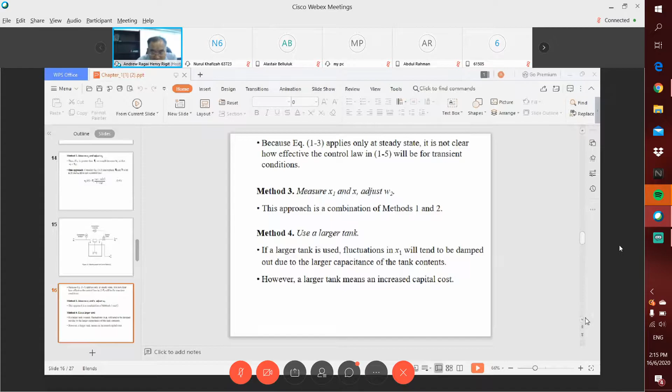Okay. So I just moved my office next to Dr. Norman Zaimin, the Deputy Dean's office. Yeah. So it's next to the Dean's office. So probably I cannot shout like before. That's why I purposely borrowed a microphone from Dr. Amir for this class. Yeah? So I can speak in a medium, I guess, not so loud, but hopefully all of you can hear me. Yeah.

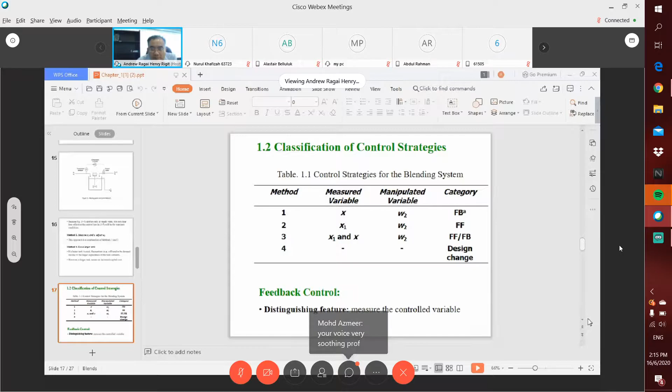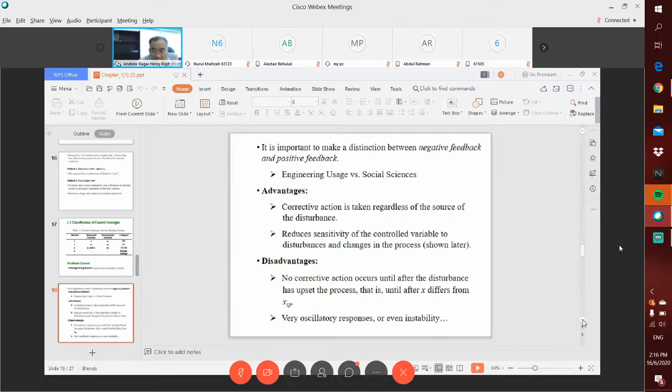So there's the four methods that we're looking into: method 1, 2, 3, and 4. And then from there we look into the concept of feedback control. And we look into the advantages and disadvantages of feedback control systems. And then for feedback, also we have feed-forward control.

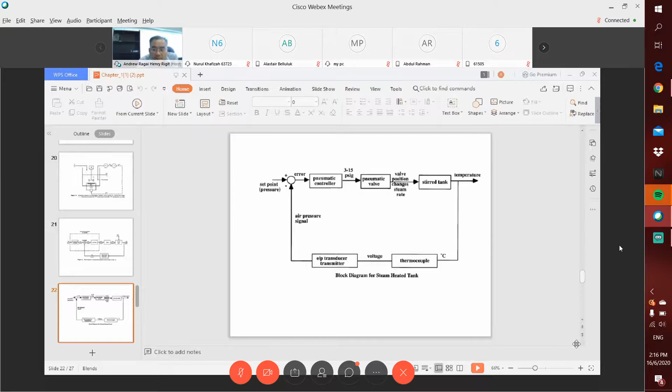And then finally, we discuss the justifications of process control. So what are the justifications of process control? So we have as many as 9 specific objectives of control here. Starting from increased product throughput,

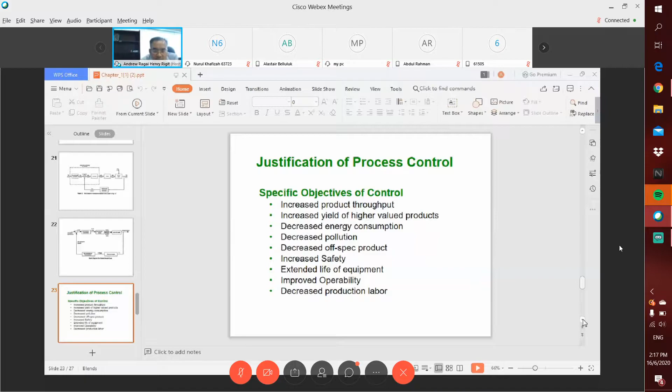increased yield of higher valued products, decreased energy consumption, decreased pollution, decreased off-spec product, increased safety, extended life of equipment, improved operability, decreased production labor. So the 9 specific objectives of control.

And if we interpret that quantitatively, through some qualitative results as shown in the graph here, we look into before control and after control. So we minimize the number of off-spec products when we apply control, as shown by these two graphs here, before A and after control system applied B. Okay?

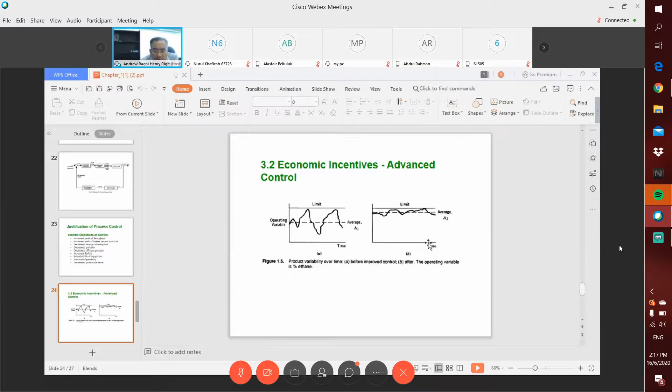And this is the distribution, the Gaussian type distribution. So you can see here that after you applied control, the range becomes narrow, when we have control systems in place.

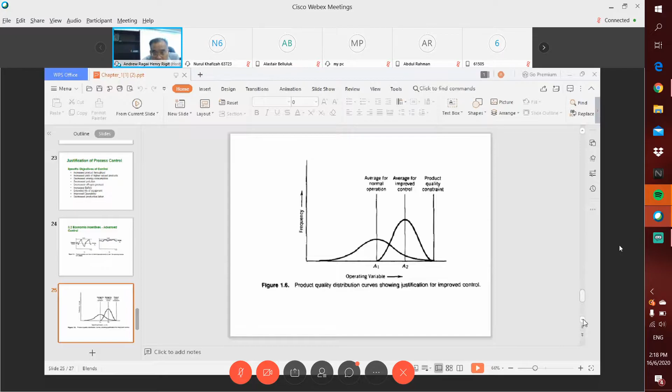So what you have learned before together with Dr. Fikri in the earlier part of the course, before the MCO, we discussed a lot about measurements and actuations and the sensors. Then we moved on to safety, environment, and equipment protection.

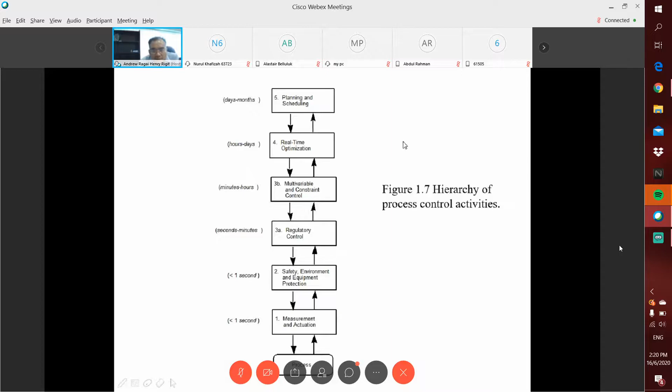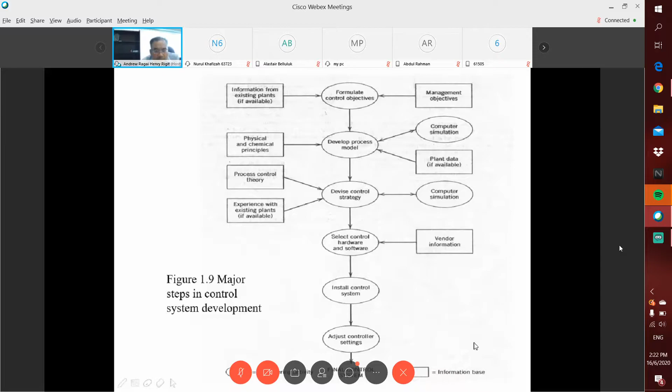And with that, next we can select control hardware and software together with some information from the vendor or the supplier of the hardware, the equipment, or the software, for the control systems as well as for the simulations. And from there, we can install the control system, and we can also adjust the controller settings accordingly. And finally, we have the final control system. So that is what we covered last week.

Okay. So for today's lecture, we will look into mathematical modeling.

You can see my ELIP website, right? All of you can see it? Okay. So I can open this PowerPoint,

on mathematical modeling. So we look into what it actually means with mathematical modeling of chemical processes that can be used in control systems. So just some idea what mathematical modeling means. Basically, a mathematical model is a representation of the essential aspects of an existing system or a system to be constructed, which represents knowledge of that system in a usable form.

So everything should be made as simple as possible, but not simpler, because remember in the lecture last week, we saw that when we develop the mathematical model, we need to come up with certain assumptions. Of course, the understanding of the theory or the fundamentals of the process, be it addition of heat, for example, will lead to energy equations. Or the understanding of conservation of mass will lead to the calculation of a mass flow rate or velocity in this case.

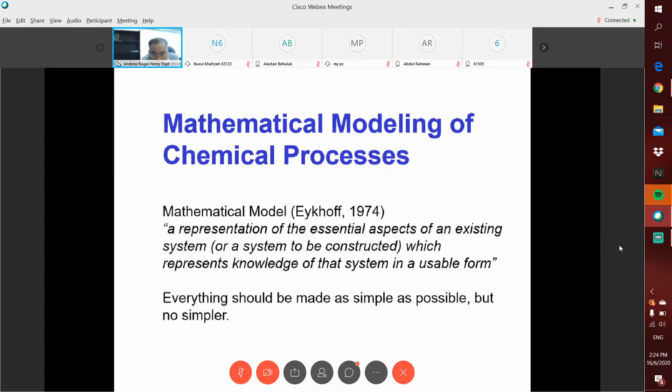So the general modeling principles: the model equations are at best an approximation to the real process, where we say that all models are wrong, but some are useful. With the view that you come up with a model based on certain assumptions, it is only as good as your assumptions. So if you come up with bad assumptions, the models are probably not 100% correct. So that's why we say that all models are wrong.

But nevertheless, based on the assumptions that we made for that particular process, it will be useful. It will probably not be 100% correct, but we try to make it as accurate as possible. So mathematical models are applied in engineering activities. The third point is that modeling inherently involves a compromise between model accuracy and complexity on one hand, and the cost and effort required to develop the model on the other hand.

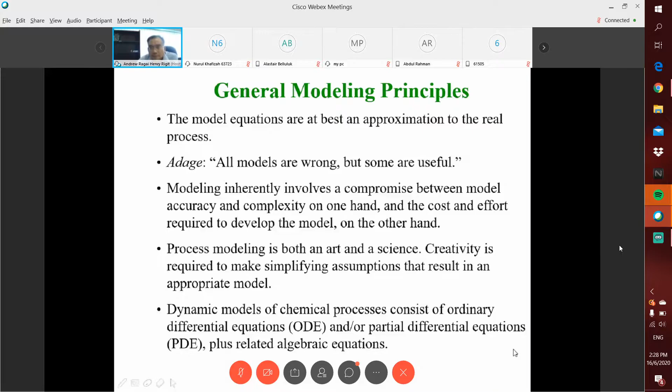First of all, we need to state the modeling objectives and the end use of the model. And they will determine the required levels of model detail and model accuracy. So from there, after you determine the objective, in other words, what's the purpose of the model, we come up with number 2 there, to draw a schematic diagram of the process and label all process variables.

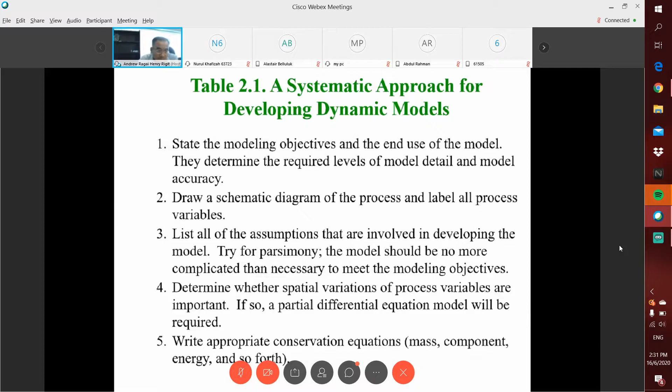Then number 6, we need to introduce equilibrium relations and other algebraic equations from thermodynamics, from your understanding of thermodynamics, transport phenomena. Transport phenomena is mass transfer. Thermodynamics is normally with regards to heat or energy. Transport phenomena is the terminology used in chemical engineering when we're talking about mass transfer. Chemical kinetics as well as the equipment geometry.

And from there, we perform a degrees of freedom analysis to ensure that the model equations can be solved. So we solve in X direction, Y direction, Z direction, etc. And number 8, we need to simplify the model. When we simplify the model, it is often possible to arrange the equations so that the dependent variables or outputs appear on the left side and the independent variables or the inputs appear on the right side. This model form is convenient for computer simulation and subsequent analysis.

So we have our point there that we want: we want that the physical process can be mathematically modeled. And when we have a set of outputs and inputs in the form of equations, then we have some sort of matrix form, and this can be used for computer simulation and other analysis later on. Number 9, we need to classify the inputs as disturbance variables or as manipulated variables.

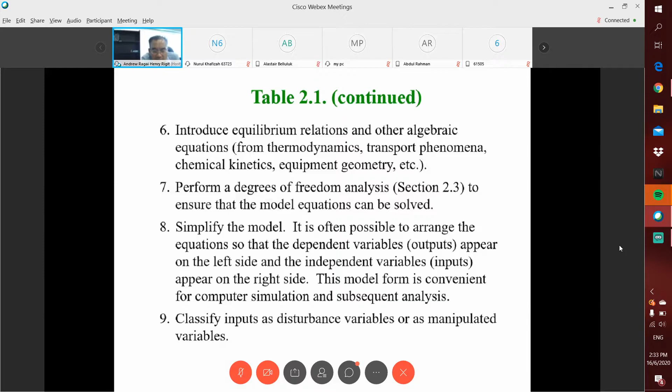So what are the modeling approaches? First, we have the physical or chemical, with regards to fundamental or global theory. The model structure by theoretical analysis will cover material or energy balances. Material, talking about mass. Energy, talking about the equations of heat transfer. And then heat, mass, or momentum transfer. And from thermodynamics, we have the chemical kinetics as well as the physical property relationships.

So the model complexity must be determined based on our assumptions. The more complex your assumptions, the more complex is your model, in other words. And it can be computationally expensive and cannot be done in real time. And some of these models could be expensive or very time consuming to obtain. But what we notice now, with the advancement in information technology, our computer systems have become more and more powerful.

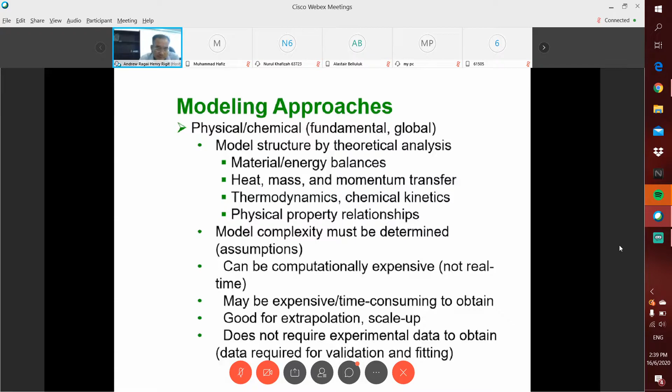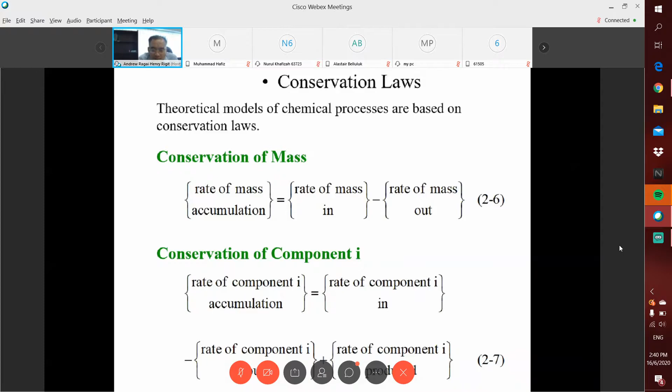We also can have conservation in the I, J, K directions, or X, Y, Z directions, where I is the unit vector in the X direction. We're talking about the rate of component I accumulation equal to the rate of component I in minus the rate of component I out plus the rate of component I produced.

With regards to conservation of energy, this refers to the general law of energy conservation, called the first law of thermodynamics. It can be expressed as: the rate of energy accumulation equals the rate of energy in by convection minus the rate of energy out by convection, plus the net rate of heat addition to the system from the surroundings, plus the net rate of work performed on the system by the surroundings. So the total energy of a thermodynamic system, U total, is the sum of its internal energy, kinetic energy, and potential energy, as given by equation 2.9.

Any questions so far? No, sir, thank you. Okay. So most of you can follow me? Yes. Okay, great.

What we are doing now is very fundamental. Basically, what we try to do, in other words, is apply what you have learned in thermodynamics, fluid mechanics, as well as your good understanding of mathematics, especially algebra and vectors from your Maths 1, 2, 3, and 4, and come up with mathematical modeling, and from here we're talking about the simulation.

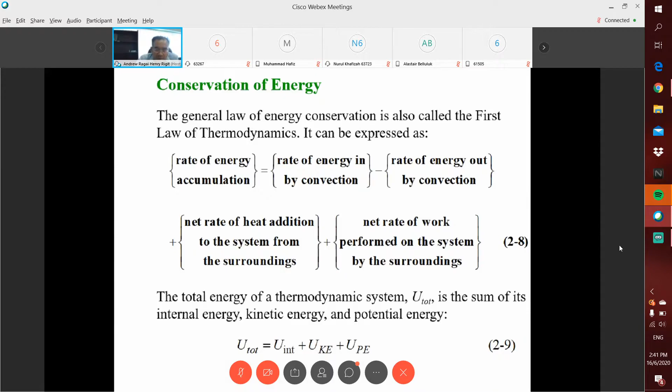So here we're talking about empirical value, or in other words known as the black box, where we have a large number of unknown parameters, and it can be obtained quickly, for example through linear regressions. Normally the model structure is subjective, but nevertheless probably it's not appropriate to extrapolate it.

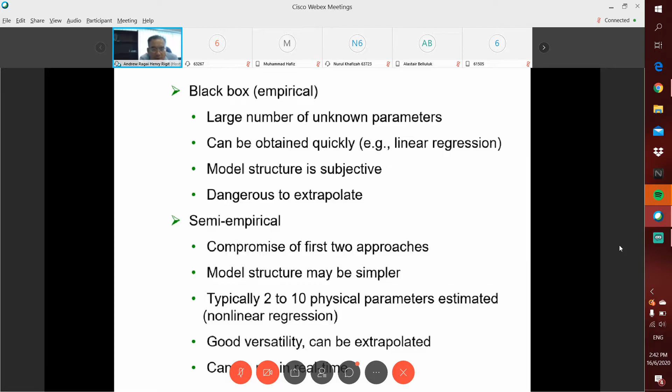Then we also have the semi-empirical. This is the compromise of the first two approaches, where the model structure may be simpler, and typically 2 to 10 physical parameters are estimated with non-linear regressions, and it has good versatility and can be extrapolated. This leads to the concept of real time, because semi-empirical models can be run in real time.

For linear regressions, we have equations of y equal to C0 plus C1x plus C2x2. So it's a curve which means x2 there.

So the number of parameters affects the accuracy of the model, but confidence limits on the parameters fitted must be evaluated. Therefore, the objective function for data fitting is to minimize the sum of squares of errors between data points and model predictions, where we use optimization code to fit parameters.

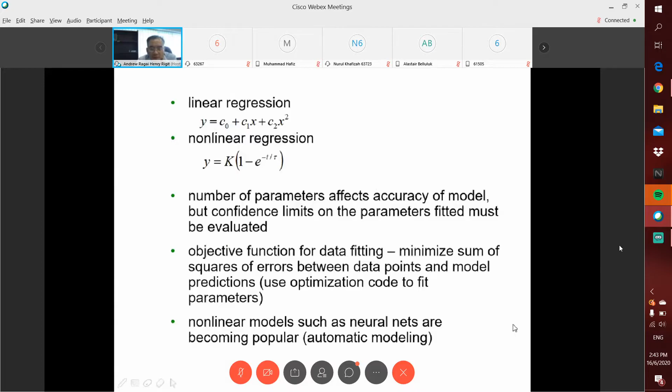And non-linear models such as neural nets are becoming popular, and that will lead to automatic modeling. So we actually use mathematical modeling. In short, we are using mathematical modeling first to improve understanding of the process.

So it could be a thermodynamics or fluid problem or related with energy. From there we come up with the energy equations. We're talking about energy or the flow, part of the Bernoulli equations, momentum equations, for example the conservation of energy. Basically that's improving the understanding of the process.

So the second, to optimize process design or operating conditions. Thirdly, to design a control strategy for the process. Remember, we're looking at the hierarchy of process control. And fourthly, to train operating personnel. So these are the users of this mathematical modeling.

So imagine, for example, the fourth point, you are given ANSYS and you are asked to do computational fluid dynamics based on Fluent in ANSYS. So instead of just keying in the numbers there, by right, in order for you to explain your simulation result in Fluent ANSYS in regards to flow, velocity profile, etc., you should know what the equations behind that are.

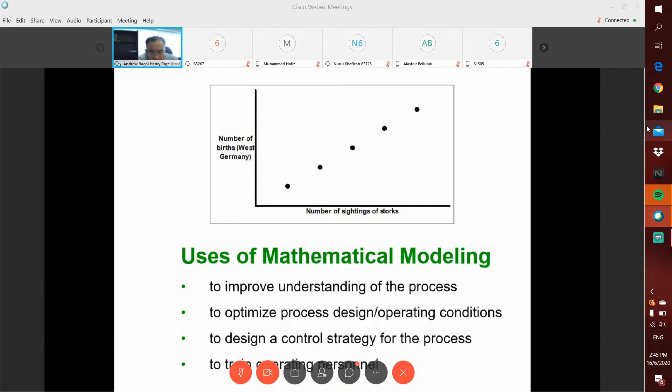Simulations work, they've been used by the computer to do the simulations work, yeah, you will be able to explain, perhaps you can explain the results more clearly and more convincingly. So that means training the operating personnel in this case.

Now we look into some of the examples, illustrative examples in developing dynamic models. So we look back into our blending process, how we model it. Remember our stirred tank blending process that we discussed last week, which I reviewed with you earlier on.

So we have liquid coming in with different concentrations X1 and W1, mixed with another fluid component X2, W2 inside the blending tank. And from there we have the output X and W. So we look into the mathematical modeling for this.

The first one, the assumption: we say that the rate of accumulation of mass in the tank equals the rate of mass in minus the rate of mass out. So this is our assumption. Here we can simply say that we do not consider leakage, for example.

Leakage, maybe the tank got a hole on it, and the thing does not come out as X and W, but due to leakage it comes out not following this conservation of mass, for example. Not to mention liquid loss due to evaporation, maybe, especially if this tank is being heated up to certain degrees. If the steam escapes, basically the mass reduces over time.

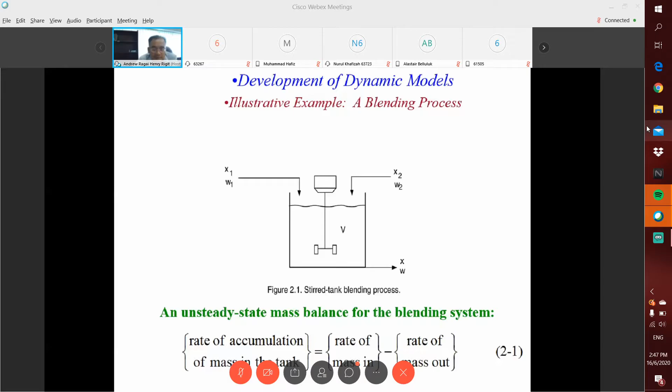So from here we have the mathematical equations: d(v rho)/dt equal to w1 plus w2 minus w. In other words, we take w equal to w1 plus w2 in our standard equations. But here, because we're talking about a process, we're talking about the change with regard to time, so it is d(v rho)/dt equal to w1 plus w2 minus w.

So w1, w2, and w are mass flow rates. And the unsteady state component balance is given by d(v rho x)/dt equal to w1 x1 plus w2 x2 minus wx.

And the corresponding steady state model was derived, given by that equation. Everything moved from the left hand side to the right hand side, so on the left becomes 0. That is considered as, or named, the steady state model.

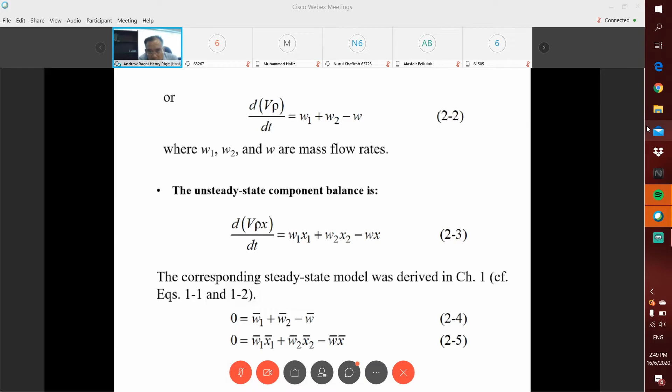Equation 2.4: 0 equal to W1 bar plus W2 bar minus W bar. And then when we also consider the concentrations, it becomes 0 equal to W1 bar times X1 bar plus W2 bar times X2 bar minus W bar times X bar, which is equation 2.5.

So if we revisit equations 2.2 and 2.3 from last week's lecture, now we are applying the differential equation to it. Rho, density, is a constant, so I take it out from that derivative dV/dt. So rho dV/dt equal to W1 plus W2 minus W.

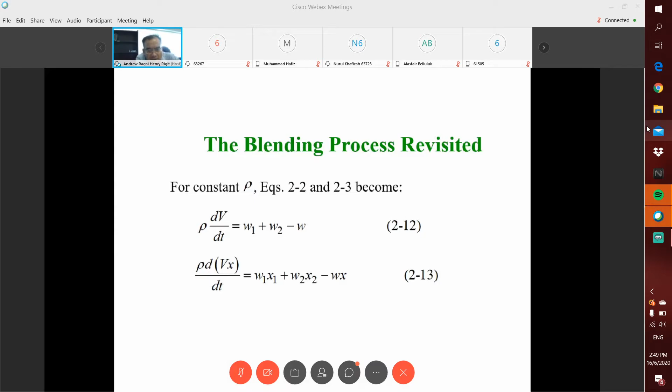And with regards to concentration X, we have rho dVx/dt equal to W1x1 plus W2x2 minus Wx, equation 2.13. So equation 2.13 can be simplified by expanding the accumulation term using the chain rule for differentiation of a product.

So in this case, the equation is further expanded to become rho d(Vx)/dt equal to rho V dx/dt plus rho x dV/dt, equation 2.14. And by substitution of equation 2.14 into 2.13, that gives the expanded equation rho V dx/dt plus rho x dV/dt equal to W1x1 plus W2x2 minus Wx.

And by substitution of the mass balance in equation 2.12 for rho dV/dt into this equation, that gives equation 2.16: rho V dx/dt plus x times (W1 plus W2 minus W) equal to W1x1 plus W2x2 minus Wx. And cancelling the common terms and rearranging equations 2.12 and 2.16...

...a more convenient model form is obtained as dV/dt equal to 1 over rho times (W1 plus W2 minus W), and dx/dt equal to W1 over (V rho) times (x1 minus x) plus W2 over (V rho) times (x2 minus x), equations 2.17 and 2.18 respectively.

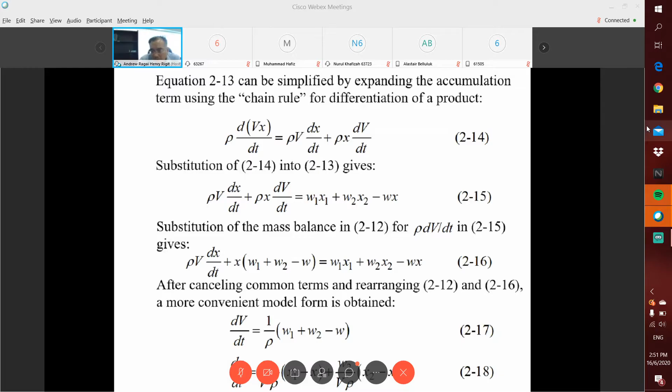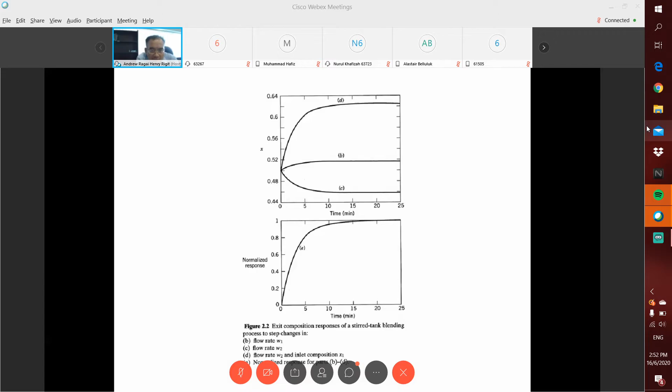So we can see here, figure 2.2, the exit composition responses of a stirred tank blending process to step changes in flow rate W1, given by part B in the middle. Then flow rate for W2 in part C, also in the middle. Then for flow rate W2 and inlet composition X1, part D at the top. And the normalized response for parts B and D is shown at the bottom, part E, the normalized response.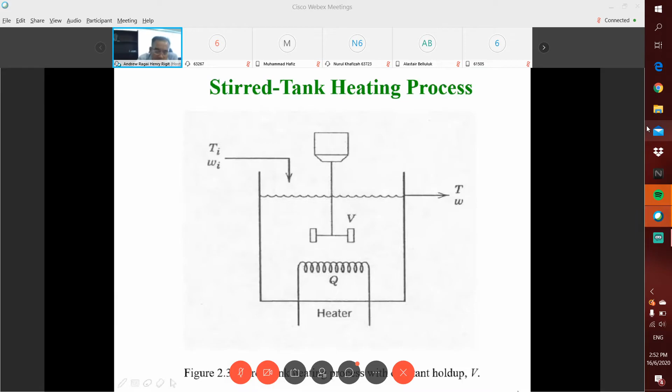So there is one example. We can also further enhance this. Instead of just looking into the volume or the mass flow rate, we can also include perhaps temperature, for example. So if you include temperature, in this case we will expand the equation to include the energy equation, making it a bit more complex.

For example, if you consider a heating process, you need assumptions such as: number 1, perfect mixing, so the exit temperature T is also the temperature of the tank content. Number 2, the liquid holdup V is constant because the inlet and outlet flow rates are equal, so we do not consider evaporation. Number 3, the density rho and heat capacity C of the liquid are assumed constant, so temperature dependence is neglected. Number 4, heat losses are considered negligible.

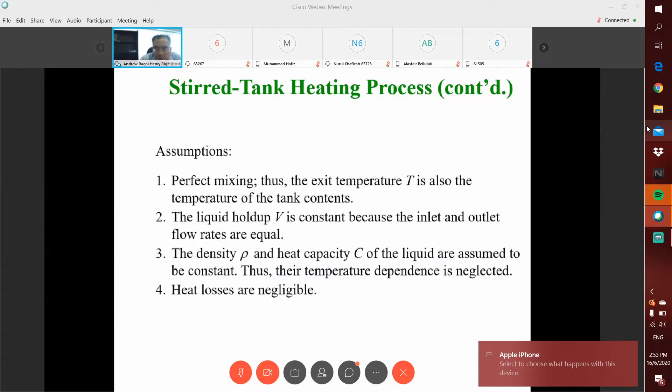So for the process considered in this topic, it is appropriate to make two assumptions. One is that the changes in potential energy and kinetic energy can be neglected because they are small compared with changes in internal energy. The second assumption is that the net rate of work can be neglected because it is small compared to the rates of heat transfer and convection.

So with these reasonable assumptions, the energy balance in equation 2.8 earlier can be written as dU internal, the internal energy, over dt, equal to minus the difference of W H caret plus Q. U internal is the internal energy of the system, H caret is the enthalpy per unit mass, small w is the mass flow rate, and Q equals the rate of heat transfer to the system.

The triangle there denotes the difference between the outlet and inlet conditions of the flowing stream, and therefore minus the difference of W H caret equals the rate of enthalpy of the inlet stream minus the enthalpy of the outlet stream.

S there because it could be more than one stream, yeah? More than one inlet or outlet in this case. Okay, so basically when you use software like Fluent, for example, in the methodology of Fluent, or other CFD software like Star-CD perhaps, or PHOENICS maybe, you're always being given this kind of equation. This is very, very brief because the triangle itself is a combination of both the inlet and outlet, the difference.

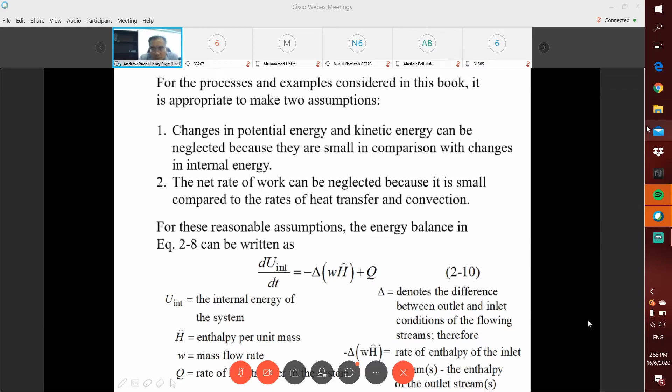Sounds a bit complicated. Of course, it's complicated because we're talking now the computer language. When we do the simulation using computer, we're talking about the computer language, which represents the equation or the models in this case. But once in a computer, then we don't care, because this model is being interpreted into the computer language. We look into examples, model development 1.

So for a pure liquid at low or moderate pressure, the internal energy is approximately equal to the enthalpy. So the internal energy U internal equals the enthalpy H, and H depends only on temperature. Consequently, in the subsequent development, we assume that U internal equals H and U caret internal equals H caret, where the caret, not bar, is the caret. So caret means per unit mass.

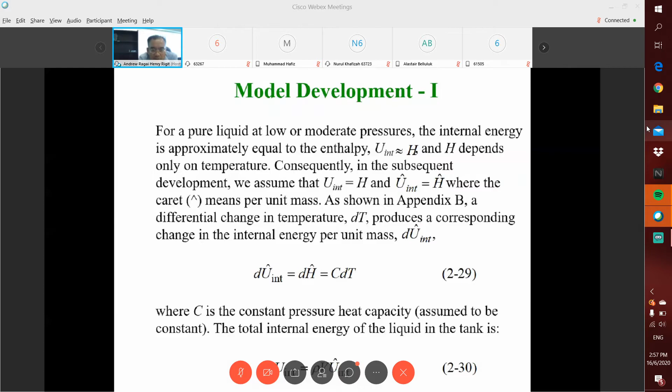So as shown in the book in Appendix B, a differential change in temperature dT produces a corresponding change in the internal energy per unit mass, dU caret internal. So dU caret internal equals dH caret equals C dT. C is actually the constant pressure heat capacity, assumed constant, just like the density rho. So the total internal energy of the liquid in the tank is given by U internal equal to rho V U caret internal, equation 2.30.

In model development 2, an expression for the rate of internal energy accumulation can be derived from equations 2.29 and 2.30. Then you have dU internal over dt equal to rho V C dT over dt. So this term appears in the general energy balance. Suppose that the liquid in the tank is at a temperature T and has an enthalpy H caret; integrating equation 2.29 from a reference temperature T ref to T gives H caret minus H caret reference equal to C times T minus T reference, where H caret reference is the value of H caret at T reference, and without loss of generality,

we assume that H caret reference equals 0, and therefore equation 2.32, H caret minus H caret reference equals C times T minus T reference, can be rewritten as H caret equal to C times T minus T ref only. So we get rid of the H caret reference there.

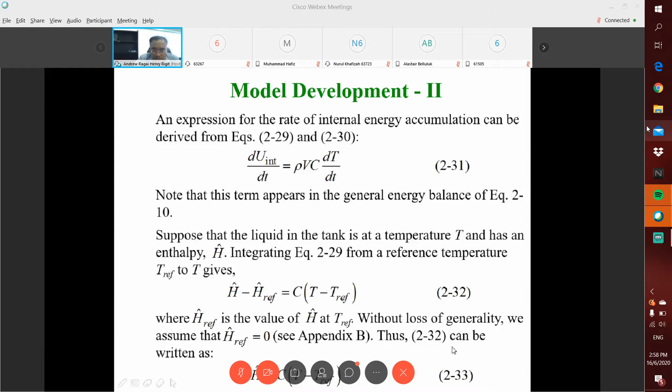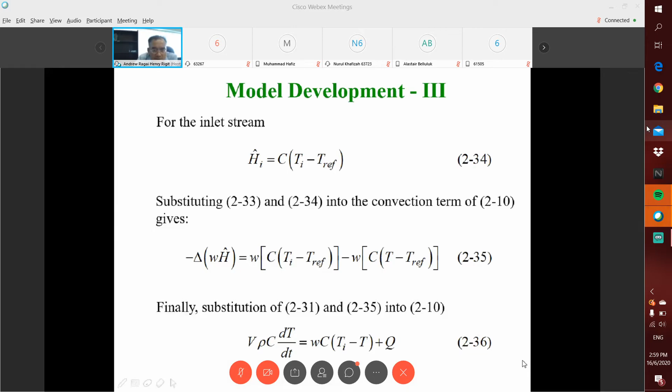So in model development 3, we're talking about the inlet stream given by H caret i equal to C times Ti minus T reference, the i denoting inlet. So substituting equations 2.33 and 2.34 into the convection term of equation 2.10 gives equation 2.35 here. And substituting equations 2.31 and 2.35 into equation 2.10, we have the general equation, rho V C dT over dt equal to wC times Ti minus T plus Q, 2.36.

And look at the equations when we define deviation variables, the deviation from the set point. We have y equal to T minus T bar, where T bar is the desired operating point. Then u equal to ws minus ws bar, where ws bar and T bar are from the steady state. Then from the equation, rho V over w times dy/dt equals minus y plus delta Hv over wC times u. Noting that delta Hv over wC equals Kp and rho V over w equals tau, at steady state y equals Kp u, and so tau dy/dt equals minus y plus Kp u.

And that will give you the general linear ordinary differential equation solution, the sum of exponentials. When we have u equal to 1, the unit step response, then we have y(t) equal to Kp times 1 minus e to the power of minus t over tau.

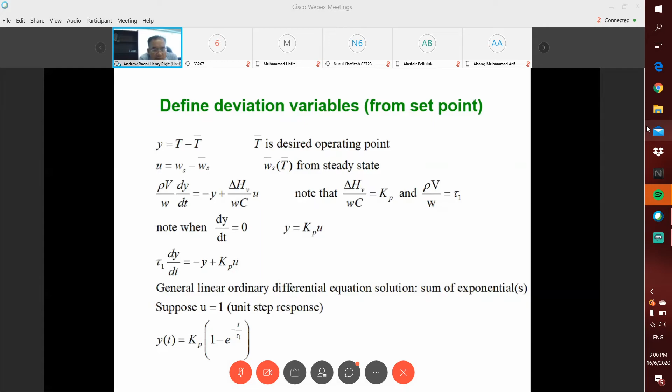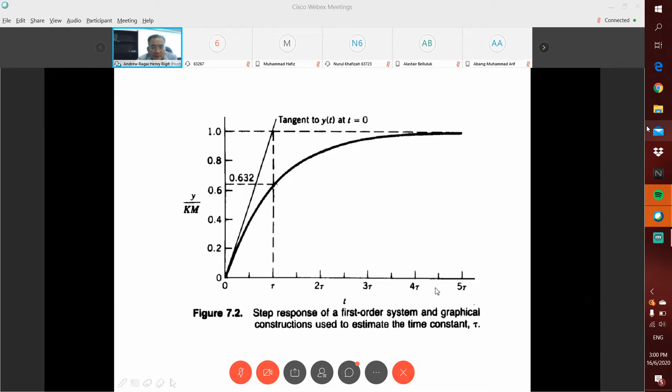So these are some of the real examples with the real value of T or T bar, delta H, for example, they are given the value. In that case, you can calculate what the time constant tau is. For example, here tau is equal to 2 hours, and we replace that in the equation. We have this kind of equation with respect to dy/dt, y, etc. So that's the point.

So y represents T minus T bar, for example. U represents Ws minus Ws bar, for example. So this is the dynamic model. And if you have the boundary conditions, then you can further reduce the equations to find the value for T, for example, or u maybe, etc.

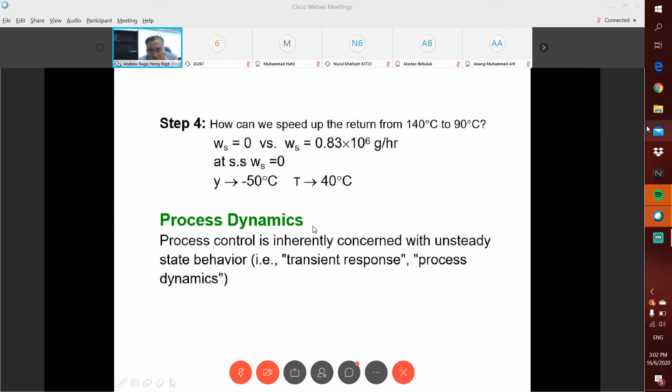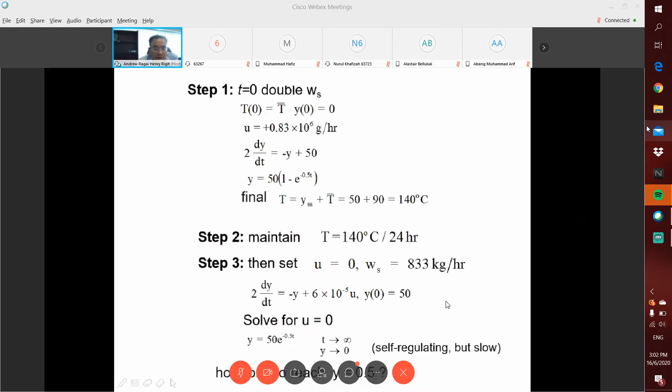So in this case, when we have this kind of equation, now we can have what's called process dynamics, which is inherently concerned with unsteady state behavior or the transient response. So from this equation, the dynamic model, we have the process dynamics. So remember we briefly discussed lag the other day.

So even in the process of stirring the water inside a tank using a heater, if there is lag between the heating element temperature and the process temperature, then we have the heat transfer limitation of HE times A times TE minus T. So therefore, in this case, the energy balances will be changed accordingly. So this is when talking about lag.

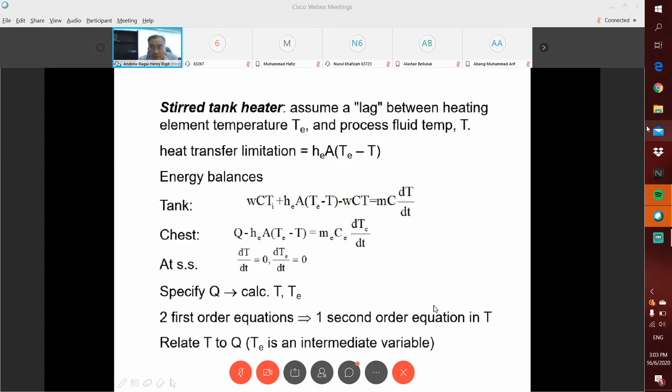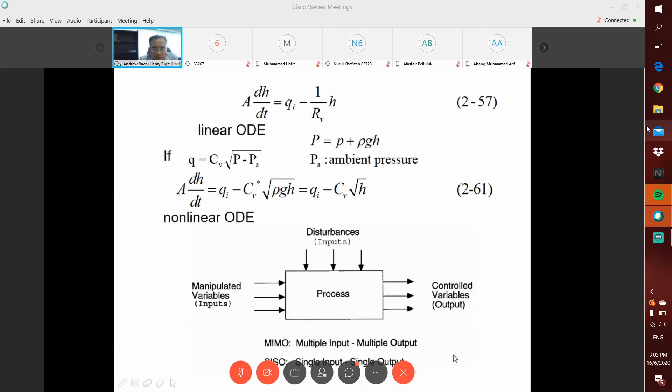So from there, we come up with the degrees of freedom analysis. We can list all quantities in a model. They are constants or parameters that can be specified on the basis of equipment dimensions, physical properties, etc. And we can also determine the number of equations NE and the number of process variables NV. Note that the time t is not considered a process variable because it is neither a process input nor a process output.

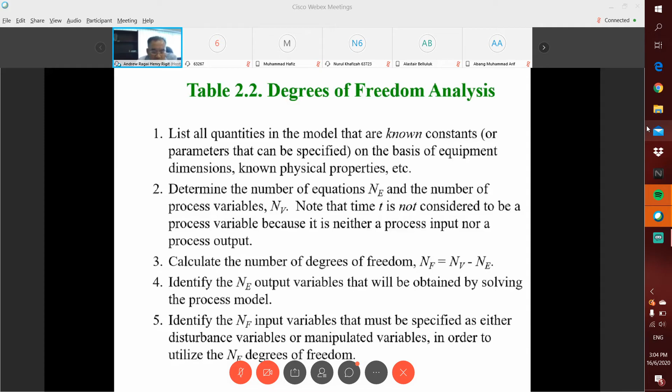And we can calculate the number of degrees of freedom NF equal to NV minus NE. We can identify the NE output variables that will be obtained by solving the process model. And we can identify the NF input variables that must be specified as either disturbance variables or manipulated variables in order to utilize the NF degrees of freedom.

So for the degrees of freedom analysis for the stirred tank model, the three parameters are the volume V, the density rho, and the constant C. And the four variables are the temperature T, Ti, W, and Q. And the equations are represented by only one equation, equation 2.36. So you can see that all the parameters and variables are joined in only one equation, equation 2.36.

So from here you can say that the degrees of freedom NF is given as 4 variables minus 1 equation, which means the degrees of freedom is 3. So the process variables are classified as one output variable T and 3 input variables Ti, W, and Q. And for temperature control purposes, it is reasonable to classify the 3 inputs as the 2 disturbance variables Ti and W and the manipulated variable Q.

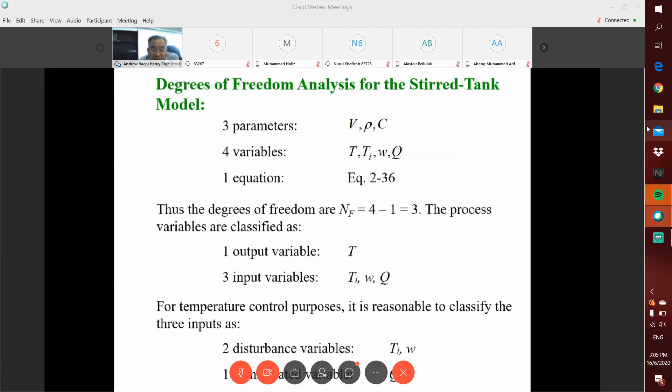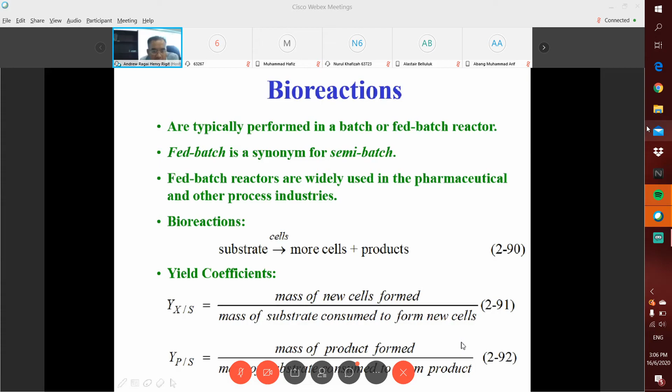Yeah. So this is one thing. You can also look into examples like biological reactions, but I will not cover it here because it's more appropriate for chemical engineering. So we will not look into that. I do not expect you to know what an enzyme is, for example. We do not study enzymes in our discipline, mechanical engineering, but more on the flow, biomass, energy, etc., not enzymes, cell growth, etc. So we do not consider this.

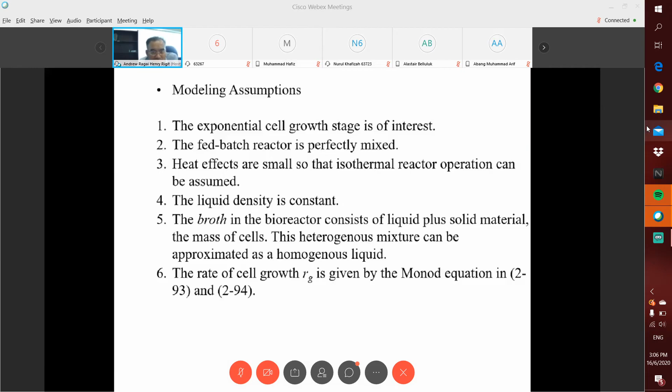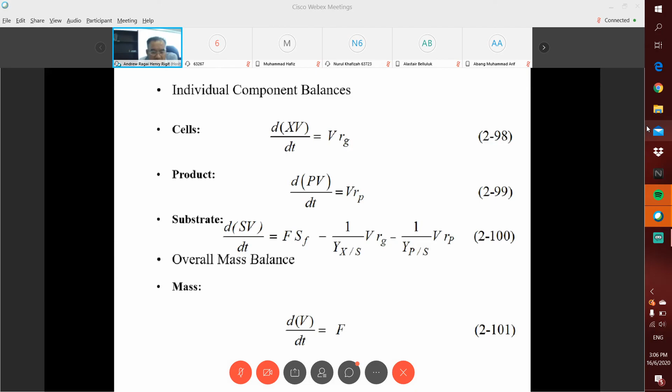But the concept is more or less the same. The approach is the same: come up with the assumptions, come up with the mathematical modeling based on the theory, and we further simplify into this order. Any questions? So you can follow so far?

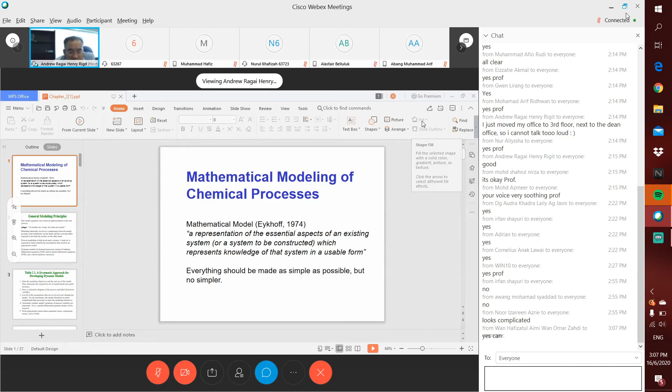It's a bit complicated, but I can say that it's as if I try to explain to you what Fluent is doing in ANSYS. That's it. So it sounds complicated, but this is what I try to do now, as if I try to explain to you how Fluent simulations are being done in ANSYS. So you have that nice picture of the simulation results. Basically, we try to explain how it's being produced, what kind of mathematical model is being used, the assumptions, etc.

So that's why for a lot of processes, especially turbulent flow, people are still doing a lot of simulation work on it, because the assumptions from one researcher to another are probably different. The physical process is probably slightly different from the previous one, and maybe their boundary conditions will be changed. Last time they used to simulate big things, but now people tend to use simulation for small things, for example. Any questions?

Okay. If no questions, I'll leave you here and we continue again on Friday morning, 10 o'clock. Because we cannot meet face to face, I'll give you a bit of a tutorial you can do during the weekend. That will help you do your assignment as well, which will replace your exam. I will give you one more assignment. Only the assignment will represent your final exam question, and you will only be able to do it in one week, most likely from 20th of July until 27th of July, a one-week window. So before you see the question, we discuss it. We do that on Friday.

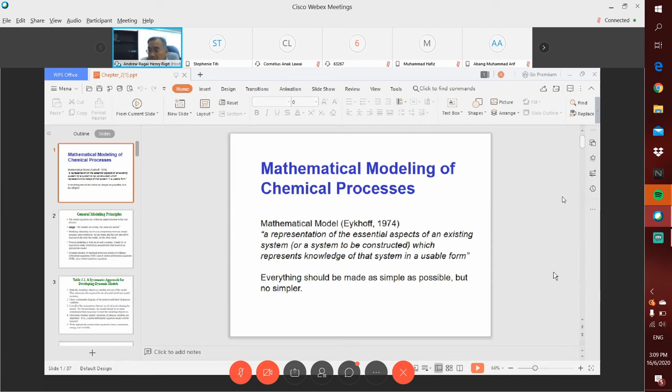So I will close this one. Let me see this one. Okay. You can see the Ellipse website, right? Okay. We will not have group project presentations anymore, but somewhere in week 13 or 14, myself and Dr. Fikri will put up the assignment questions for you. There'll be one assignment from me, which will cover the topic on control, including mathematical modeling. Friday we continue on mathematical modeling, looking into how to derive it. And next week we look into transfer functions, which will involve Laplace transformations.